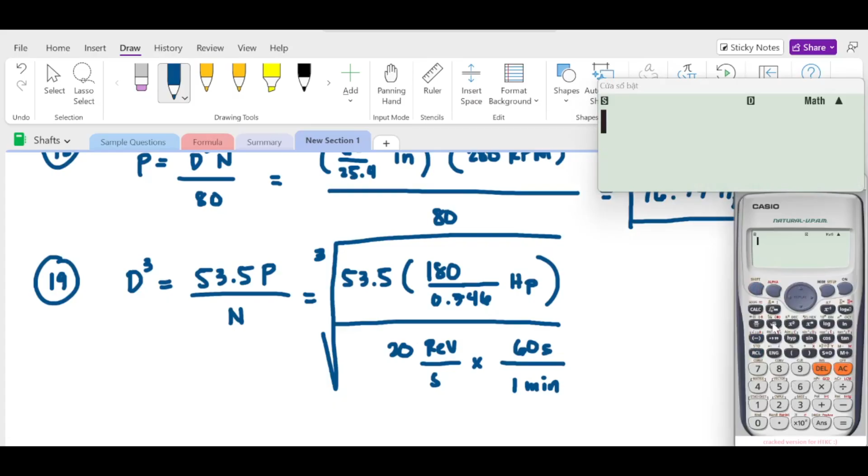2.2075 inch. Basic again. For number 19.

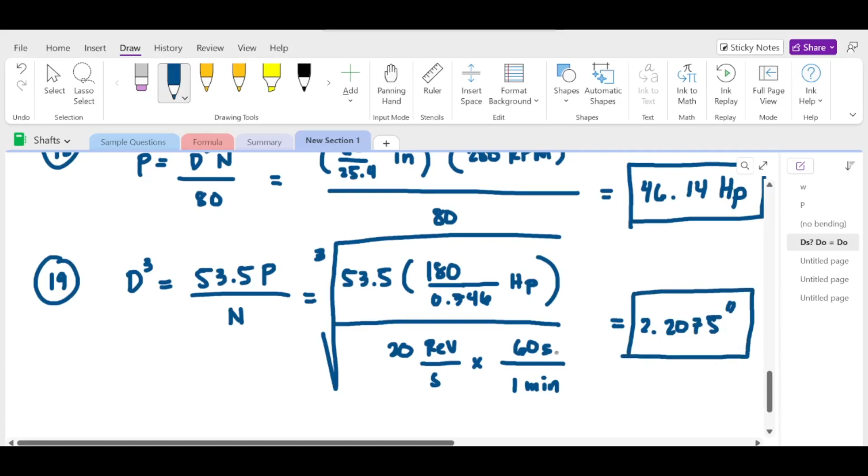So, number 20. You calculate the maximum unit shear in a 3-inch diameter steel shafting that transmits 25,000 inch-pound of torque at 130 RPM. Maximum unit shear.

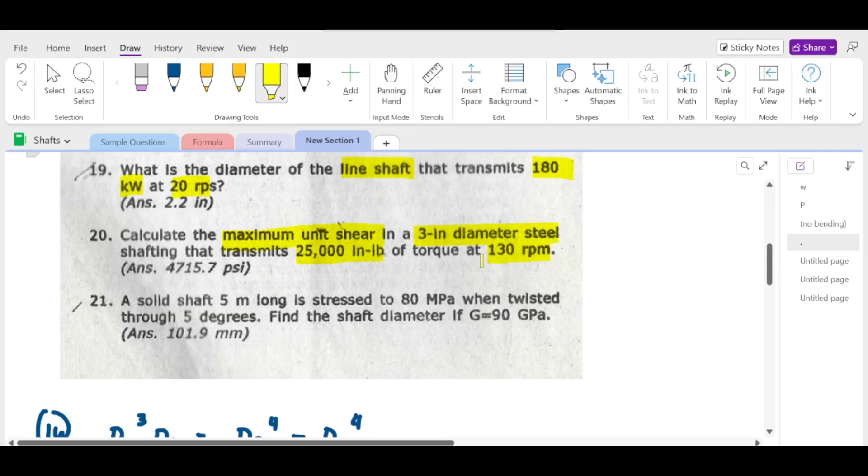So you have torque, you have N. So maximum unit shear, let's try it. Number 20, what is the maximum unit shear? Shear stress equals 16T over pi d cubed.

The given values are 25,000 inch-pound and 3-inch diameter. So 16 times 25,000 pound-inch, over pi times 3-inch cubed. What unit is there?

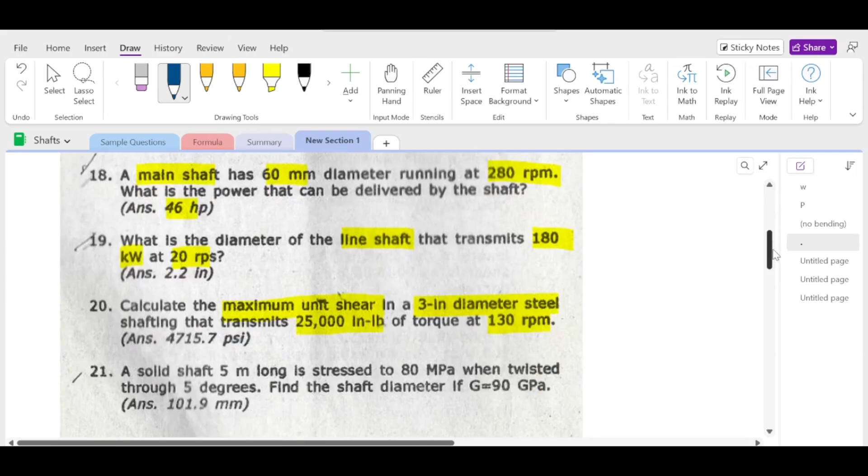PSI. Do we consider the 130? No. So let me just calculate this: 16 times 25,000, divide by 3 raised to the third power, times pi.

Oops, I pressed the wrong button. 16 times 25,000, 3 raised to the third power, times... okay it should be in the denominator. Next, times pi. There, 4715.70 PSI. The questions are basic.

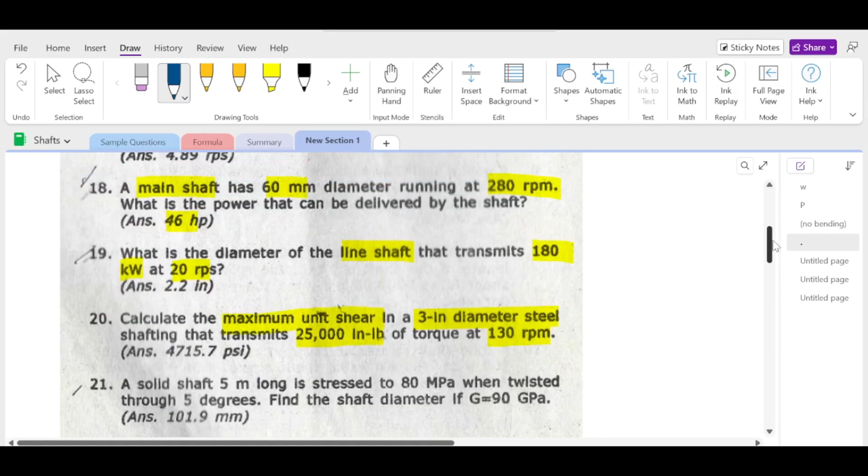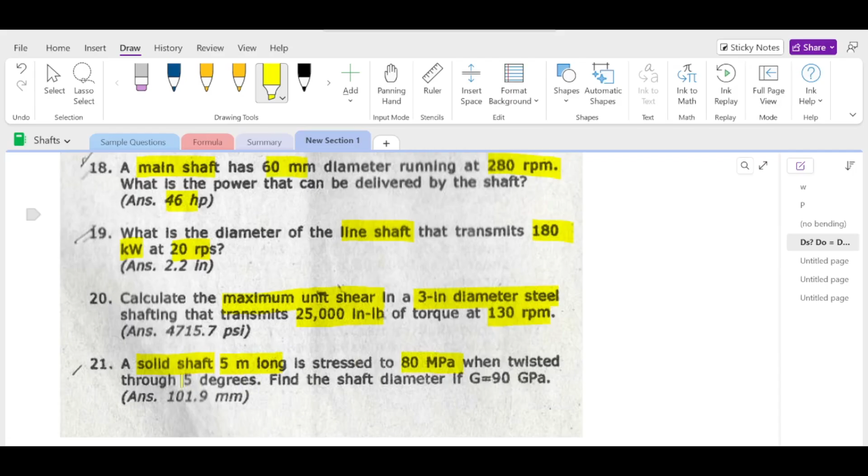So, number 21. A solid shaft, 5 meters long, is stressed to 80 MPa. When twisted 5 degrees, find the shaft diameter. Basic.

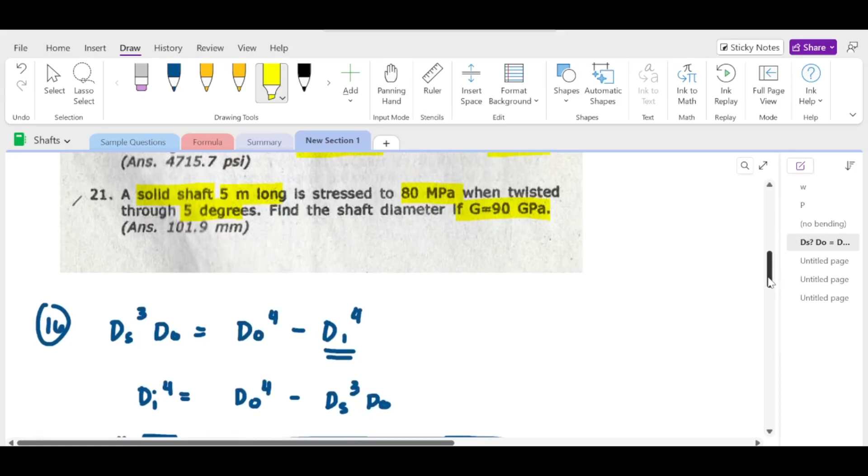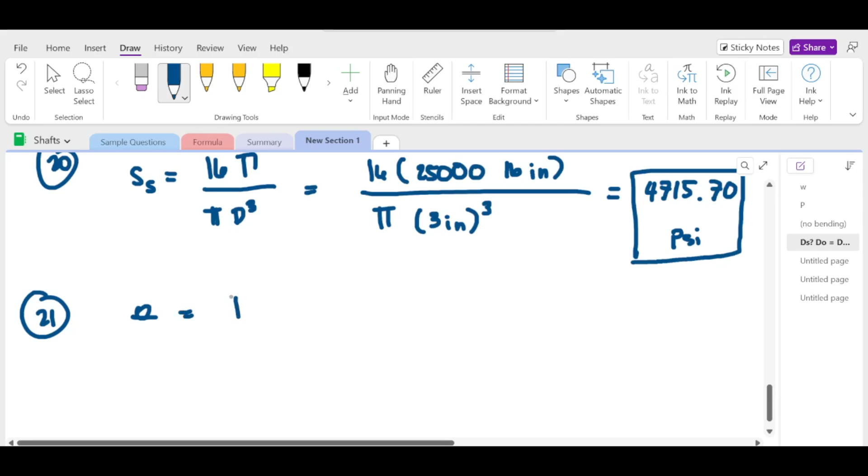So this goes to theta. Is it theta? Twisted, okay, theta. But theta is equal to TL over JG, and what we need is the diameter.

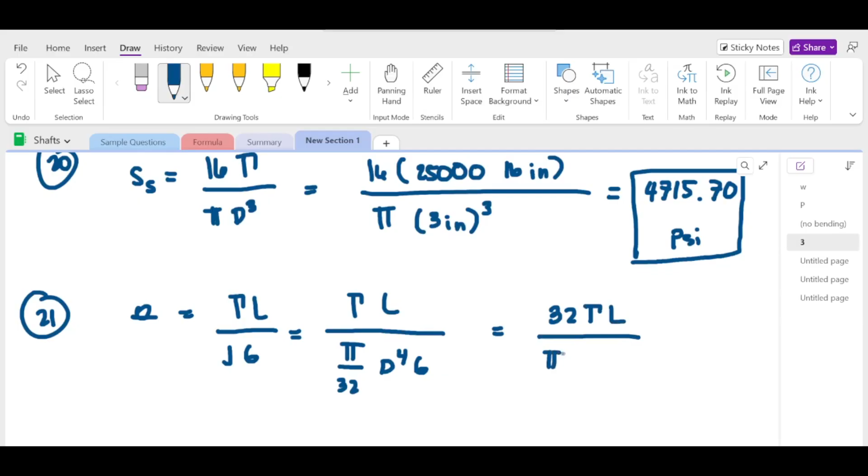So let's translate this. This is equal to torque times length, over pi over 32 times d to the fourth, times G. Let's simplify further: this is 32TL over pi d to the fourth G. What I need is D, the diameter.

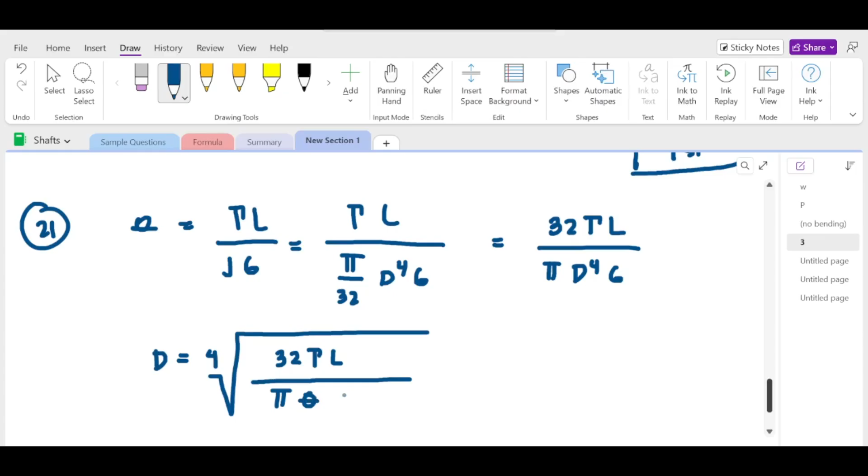So diameter is the fourth root of 32 times torque and length, divide by pi theta G. There, now I have a working equation. So our diameter is equal to the fourth root.

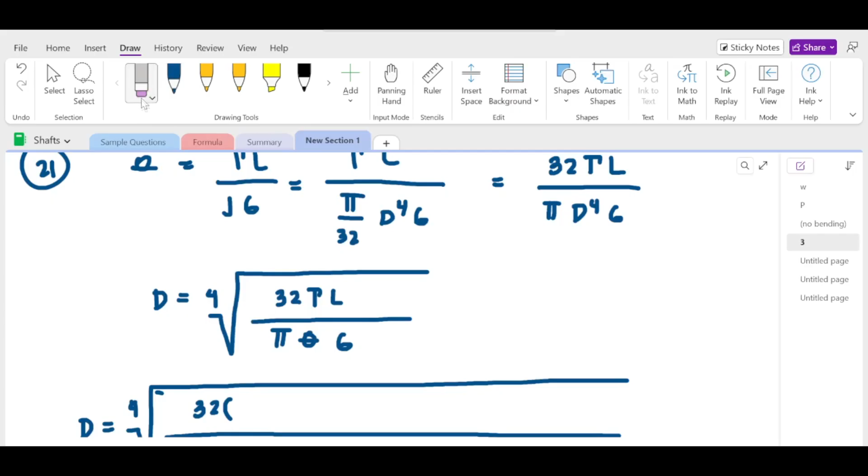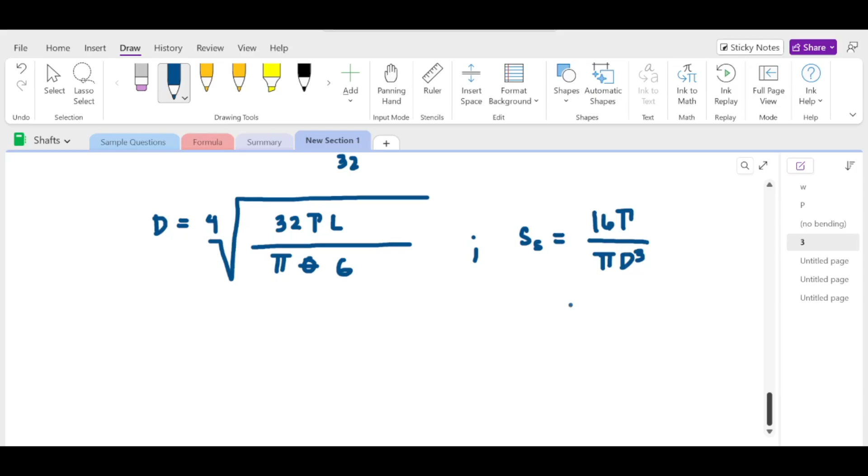From the stress. Let me erase this first. Our working equation for stress: shear stress is 16T over pi d cubed. So your torque is equal to shear stress times pi d cubed over 16.

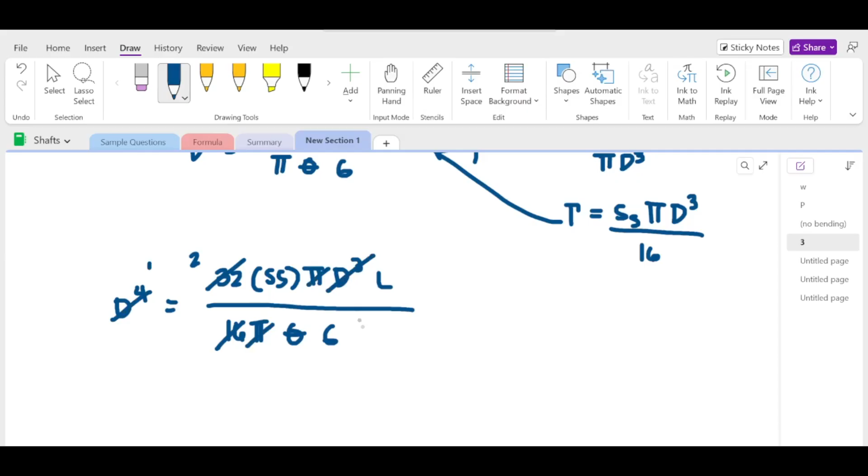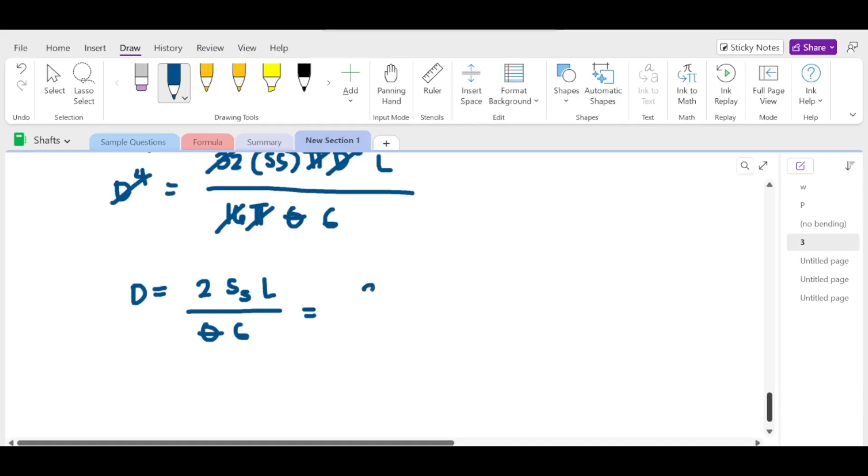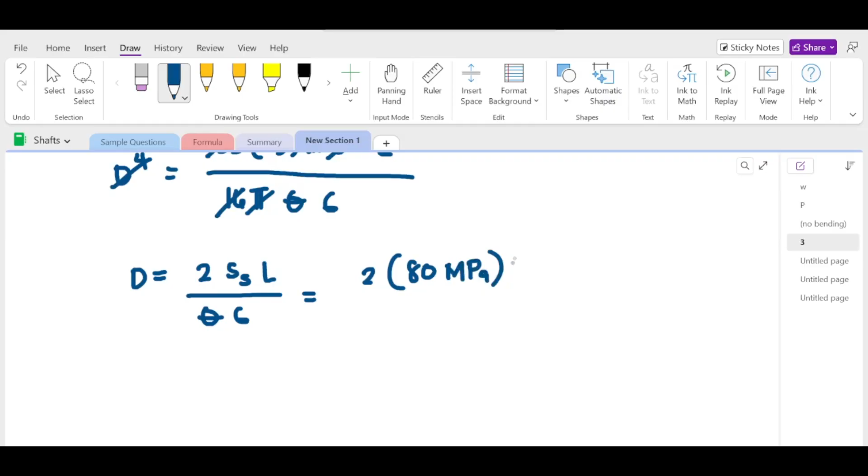So 2 times our shear stress, which is 80 MPa, 80 Newton per mm squared, or MPa. And then the length is 5 meters, so that's 5,000 mm. Divide by theta, how many degrees is that?

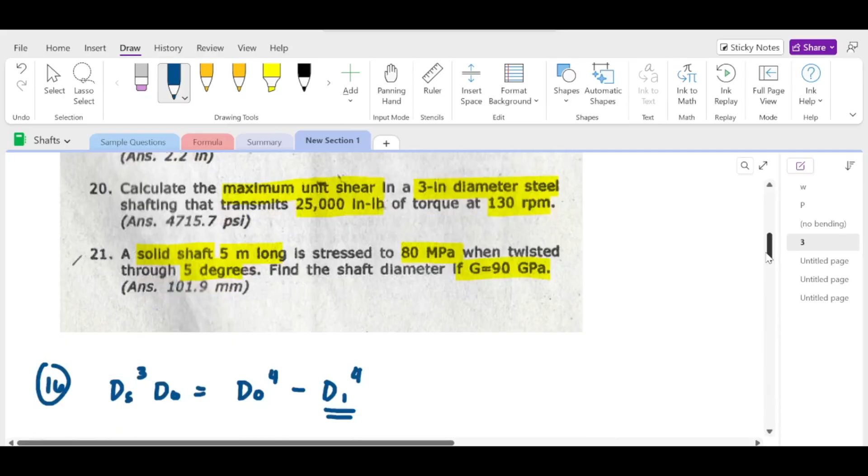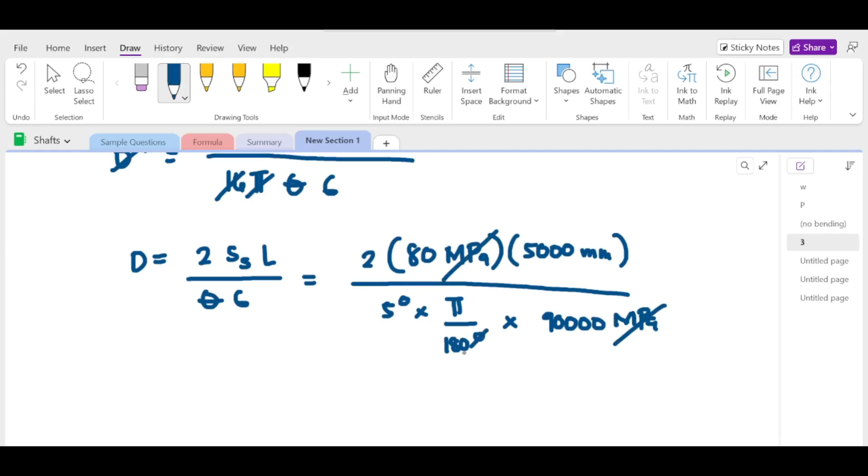5 degrees times 90 GPa. 5 degrees times pi over 180 degrees, times 90,000 Newton or MPa. Cancel all same units: the MPa and theta. What remains is just mm.

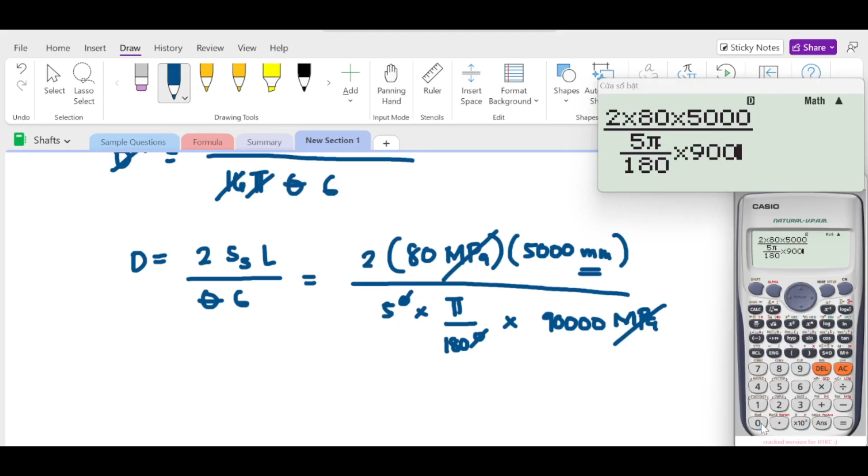So calculate the value: 2 times 80 times 5,000, divide by 5 pi over 180, multiply by 90,000. So the answer is 101.86 mm. So what is the correct answer?

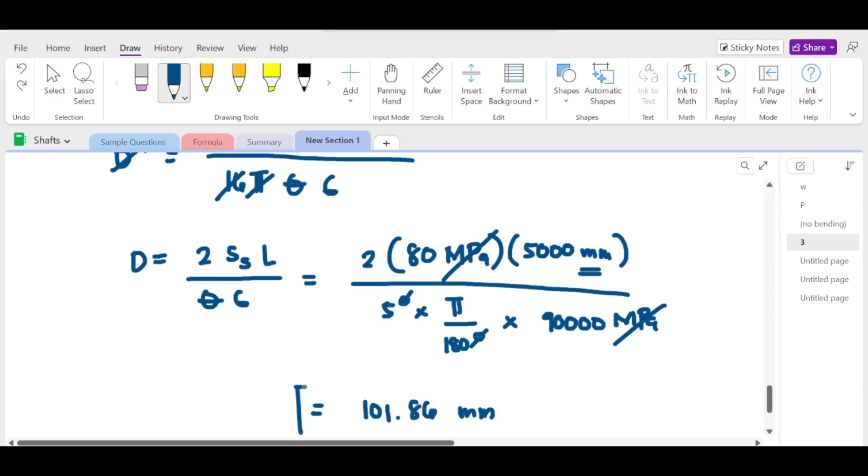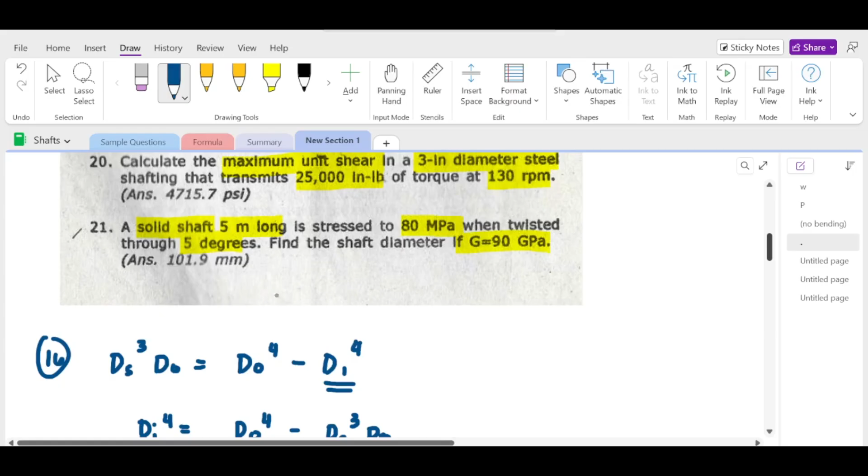Let's check if it's correct. Basic for these problems. Okay, so another set of problems after this.